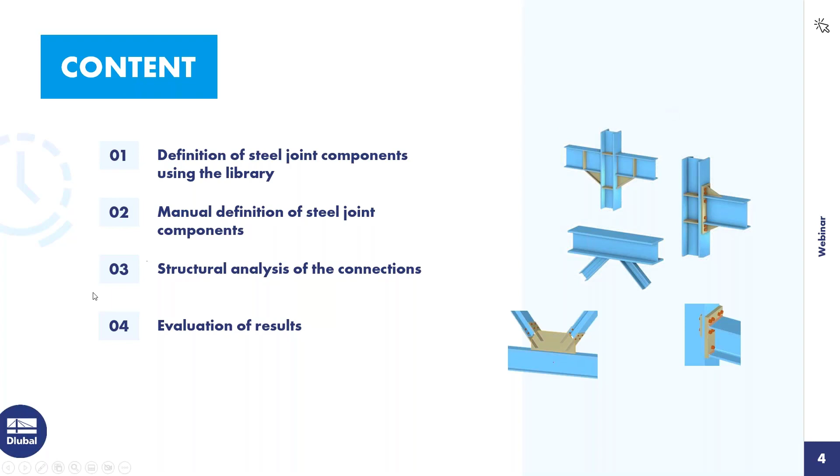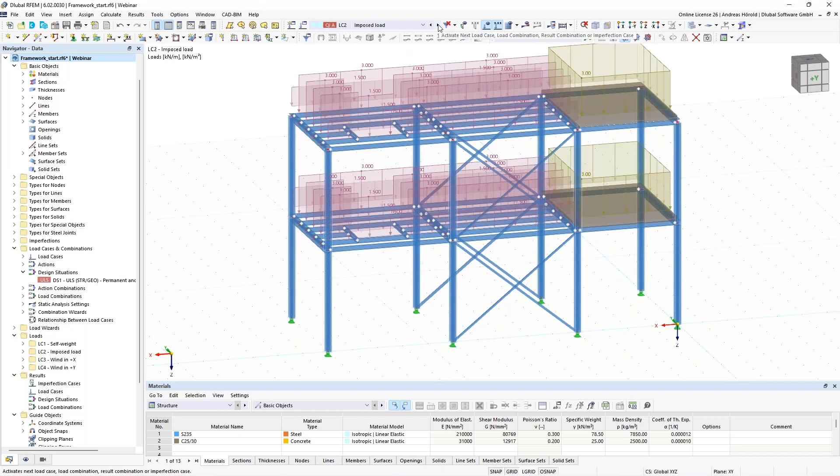Let's turn to the program, RFEM 6. Here's a simple model, a framework with frames in one direction and bracings in the X direction. We have several load cases, for example the self-weight load case, the imposed load, and two wind load cases, one in X direction and one in Y direction. We also have several combinations and a design situation.

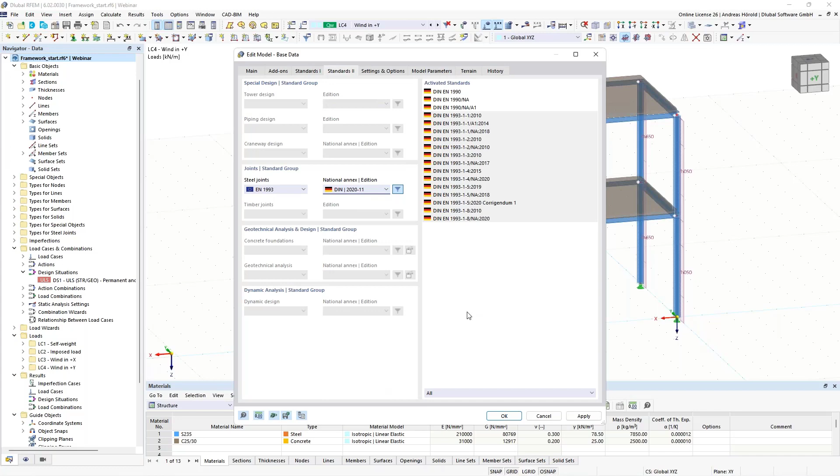To design the steel joints, I have to activate the add-on under Base Data, upper left. I open the dialog, and under Add-ons it's already activated from my test. The standard is also set here for the load case classifications, and the standard and national annex - in this case for Germany - for the steel joint design.

Once the add-on is activated, there are two new folders: Types for Steel Joints for the creation of steel joints, and at the bottom, Steel Joints Design with the design situations and ultimate configurations. I'll show you that ultimate configuration component in the next dialog.

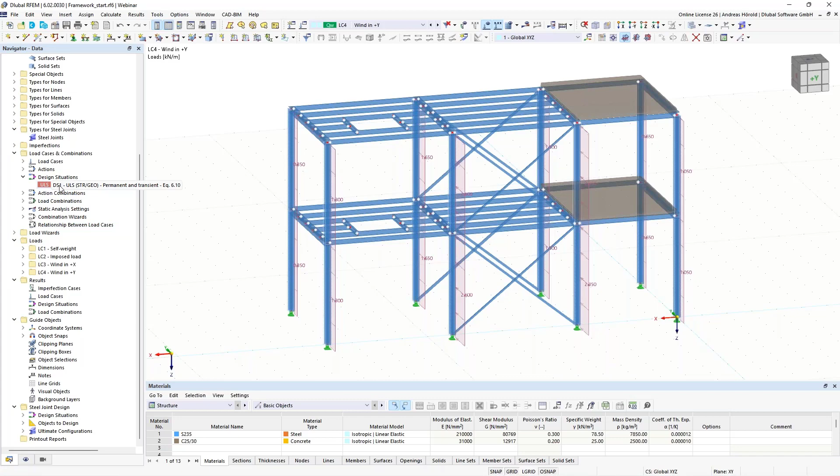But before that, let's go to the design situations. You can see again the load cases here, the actions, and the design situation. It's important to note that if you activate the add-on, the default setting is that the steel joints design is already activated - just note that it is here.

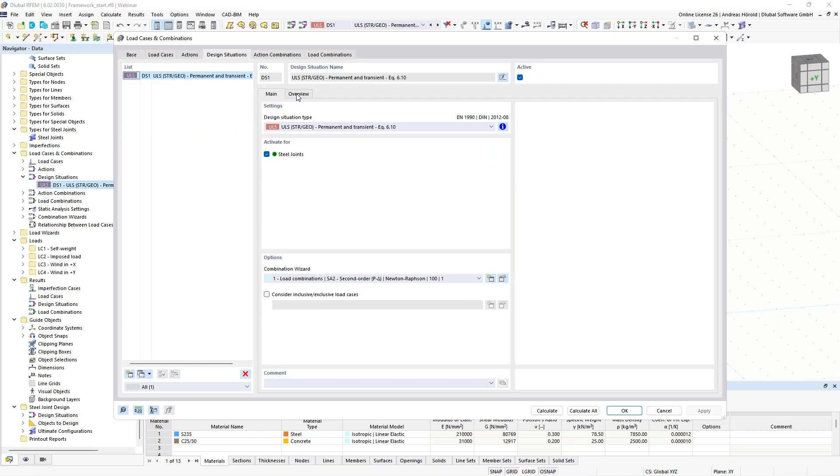These are the action combinations and the load combinations, and those load combinations are included in the design situation - you can see that here in the overview. So we can leave this dialog and start with the first steel joint.

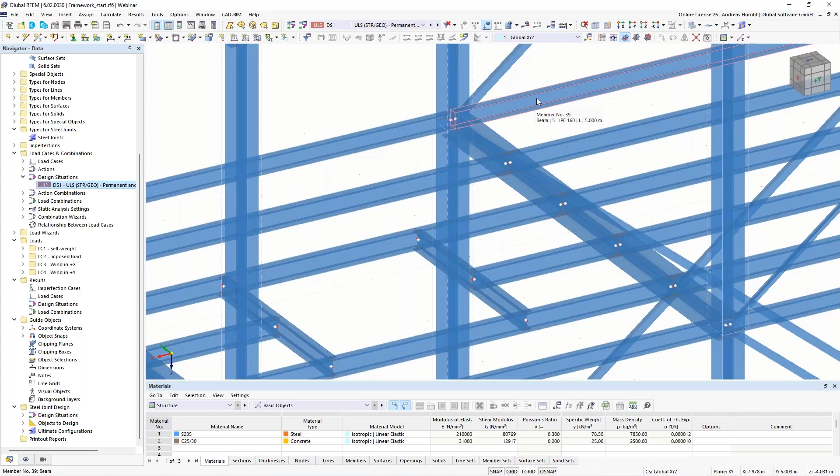Let me show you in the model. I would like to use this node here and define all connections for it: the rigid connection of the steel frame, the pin connections of the platform beams, and the two connections for the bracings, which are L sections.

Let's start. Right click on Steel Joints on the left side in the navigator data, and select New Steel Joint. First I select the joint - the node, sorry - node 33, and apply that. There are 7 members that have their end or start point at that node.

We can click through them: Member 1 is the platform beam, that's the bracing, the frame or horizontal beam of the frame, the upper column, the lower column, the other platform beam, and the upper bracing.

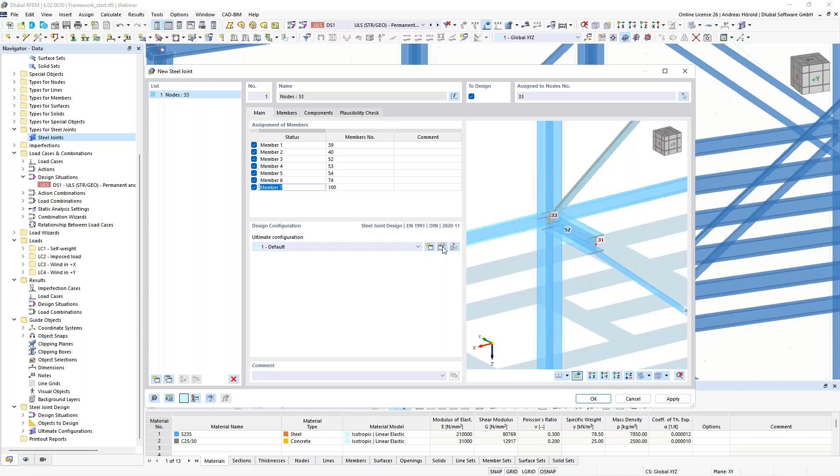Here you can see the design configuration. I'll open it - you can perform a buckling analysis. Then you can see the standard settings here, such as the maximum number of iterations, which you can increase, for example. You can also increase the number of load increments.

That's the standard setting, limit plastic strain. That's the value from the standard. And so on. I leave all settings as they are, also the safety factors here.

If you want to perform a buckling analysis, you can go to that dialog. You can also increase the number of lowest eigenvalues, number of iterations. That's the limit load factor from the standard, it's 1.5 according to the Eurocode.

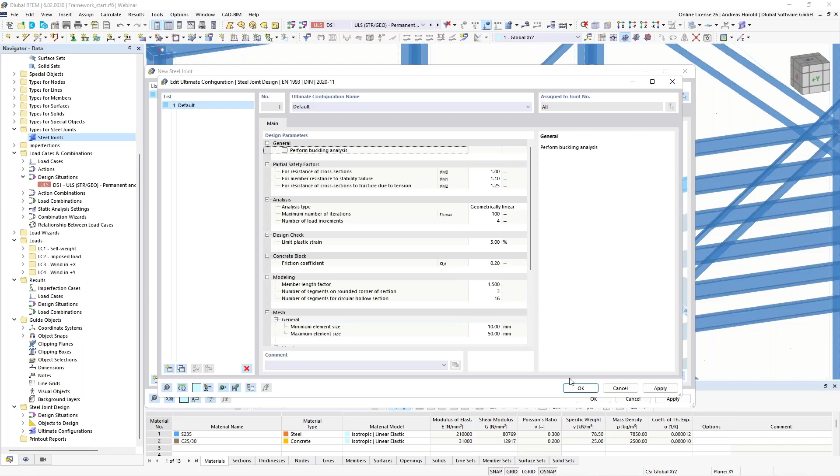Okay, then we go to the next dialog, members. The finite element analysis requires at least 1 member to be supported.

I select the lower column. The column is in reality supported here, and I will support at least this column. Okay, and we define also that the column is continuous. That's automatically overtaken for the 2 columns.

So the member settings, you can see here the member settings from RFEM, S235, and the sections, and we overtake the sections, of course.

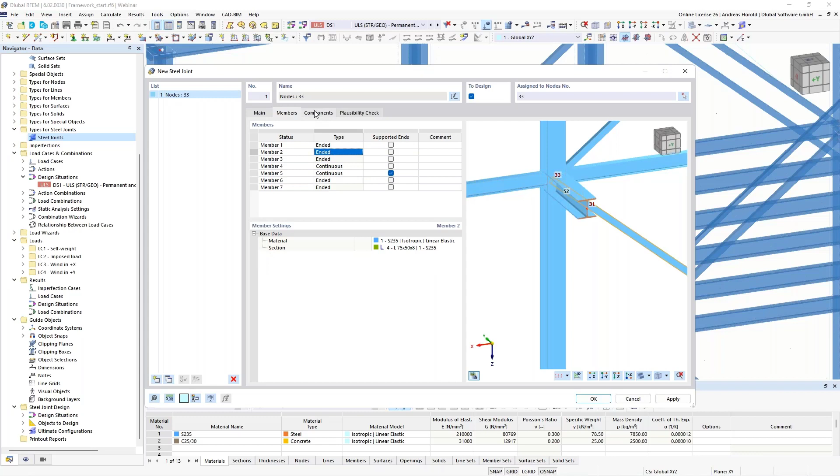So then under components, you can use the library and you can create single components. I open it. You can see 4 categories: the modifications, member cut, plate cut, we will use both of them.

Then the plate editor: plate, stiffener, haunch, and so on. Then under connection elements: end plate, fin plate. Under others: the auxiliary plane, a help plane, then the welds and the fasteners.

Yeah, that's the current state of that library. We will extend that library continuously. A team of 8 members or employees are working on the development of the add-on steel joints.

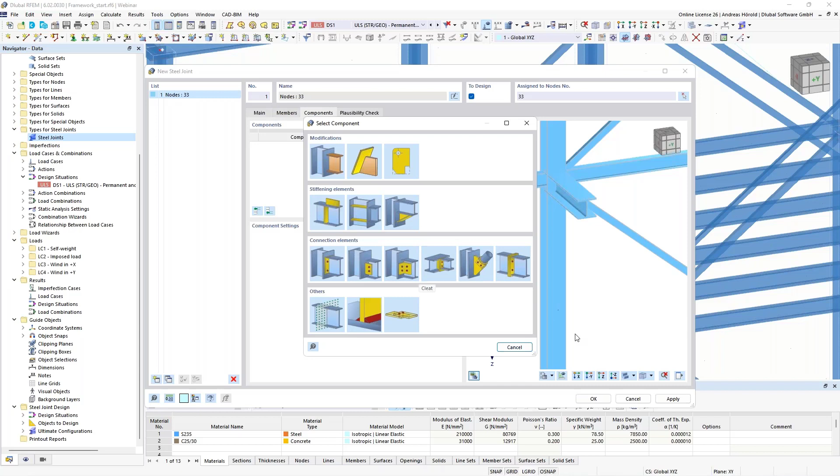We also extend the templates. I go to the template library. So there are also 4 general categories: the rigid connections, the pinned connections, truss, and the bracings.

I click through some examples: beam to beam, beam to column, with haunch, such a connection. If you download the trial version or you already bought the program, you can click through the single components.

Maybe cross joint. I will show you some pinned connections: beam to beam with cleats, fin plate, short end plate, beam to column, the same, cleats, fin plate, short end plate, and so on.

Trusses, you can use that for diagonals or for bracings. The K-joint, welded, such a connection. Also for bracings to use welded, it's quite new.

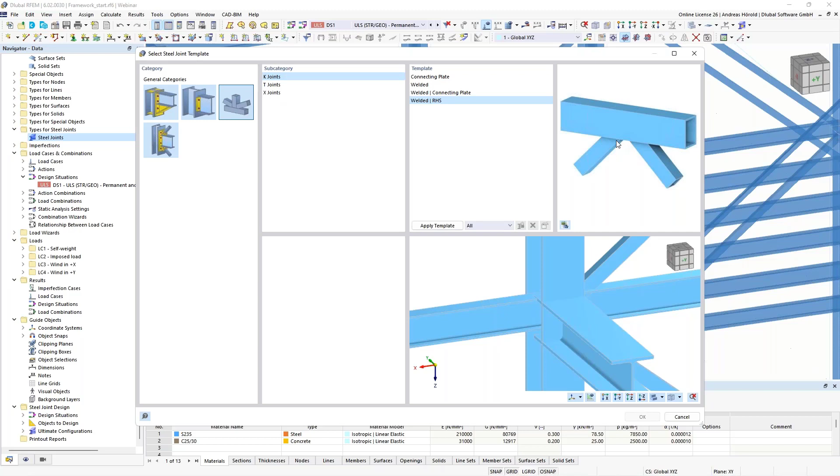The rectangular cross sections with a weld, T-joints, X-joints, and so on. Then last but not least, the bracings. Similar connection, such a connection.

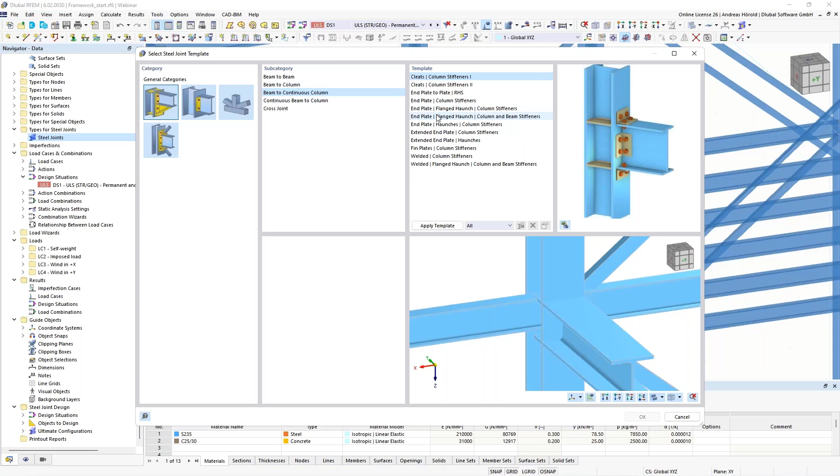But we will start with the first connection, the rigid connection. I use here the category rigid, beam to continuous column, and this one, with a haunch and column stiffeners. If I apply the template, we will see it in the preview here, right at the bottom.

And you can see we have to modify that connection. We leave the dialog with OK. And we go through the single components. So I extend the window a little bit.

Okay, so then we start with the end plate. Member 3 is okay, you can see member 3 is selected if it is chosen. Then the reference member is the column, you can see it's selected. We use a thickness of 15 millimeters.

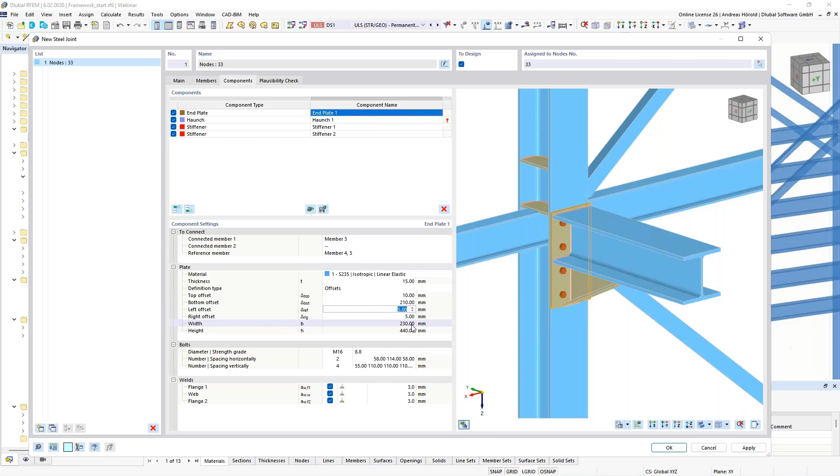Then 210 millimeters, left offset. We don't need an offset, we say 0. On the other side also 0. The rest is quite okay. So...

Then the bolts, we use a diameter of 20 millimeters and a screw strength of 10.9. So then you can use our values here, it's quite okay for this connection.

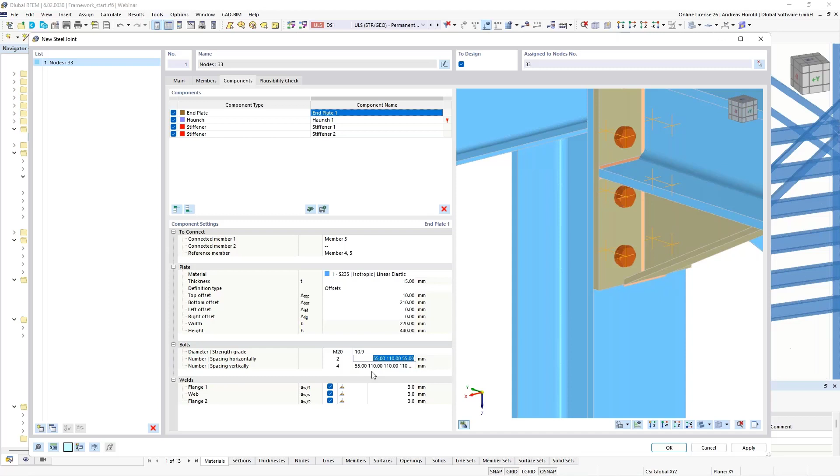I will only change the vertical spacings, I use only 3 bolts. And I only entered the first 3 values: 70, 95, 150, and the last dimension is calculated automatically.

Okay, then double fillet welds for the flange, 6 millimeters, then 4 millimeters, and also 6 millimeters.

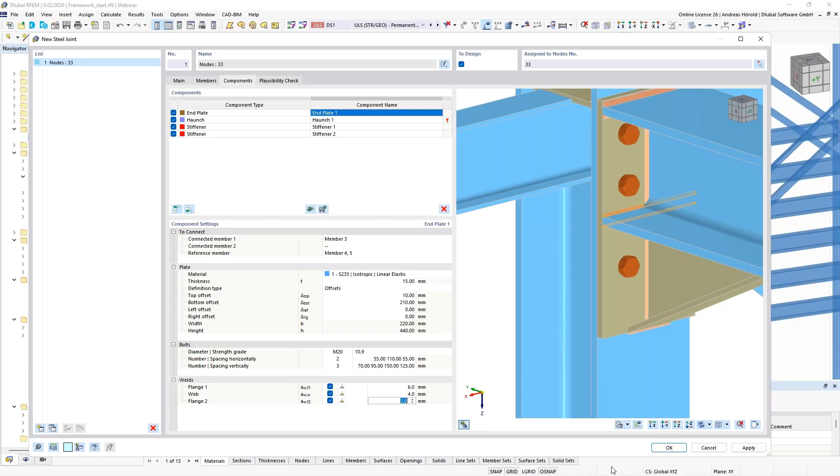Okay, now you can see we have to modify the haunch, that's the next step. So member number 3, that's okay.

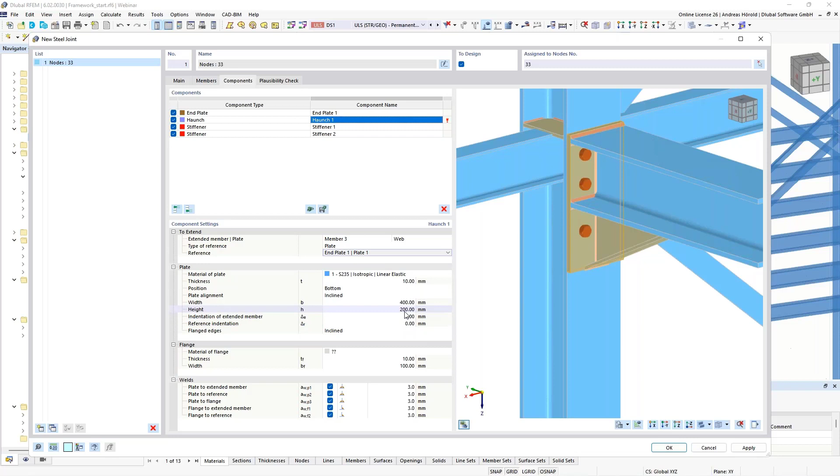So then the plate is also okay, and plate 1, that's okay. So the other values are also quite okay. I decrease that value, okay, and you can see now it's okay.

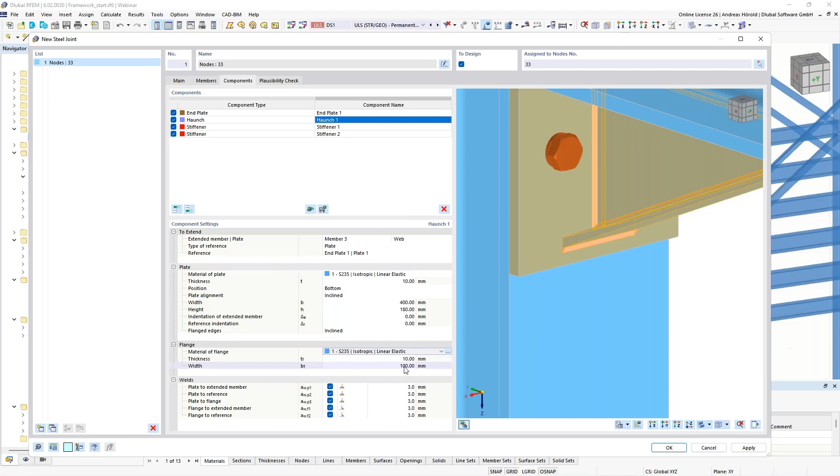So then I have to define a material for the flange, we use also the 235 steel. So then the width can be larger, 200 millimeters in that case. Okay.

So then the welds, that weld here, you can see it's selected, 4 millimeters, now we can leave the double fillet weld. Then this weld also, the double fillet weld, 4 millimeters.

Then plate to flange, this one, also 4 millimeters. So then the flange extended member.

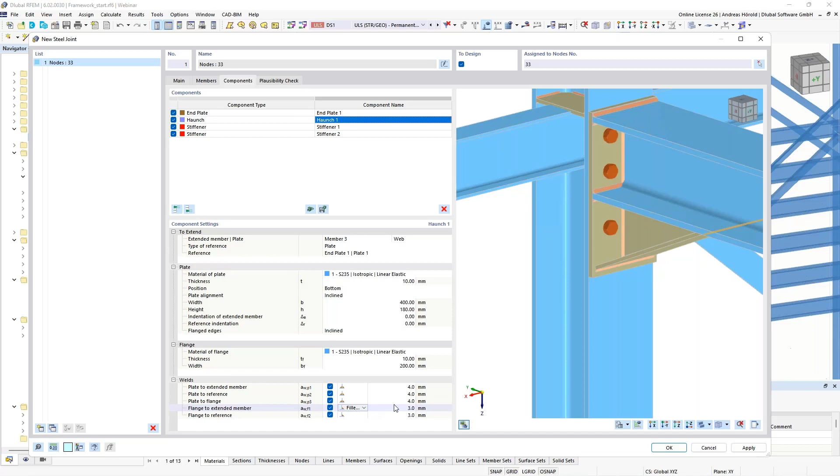Now this is this one. We use another weld, a butt weld rear side. And for this flange to the reference, it's this weld, we use a double fillet weld.

Okay, and 5 millimeters. So the haunch is quite okay, but the stiffeners not. So that stiffener should be quite okay. Let me check the values. Yeah, okay, I only define a weld of 4 millimeters. But we have to move the upper stiffener here.

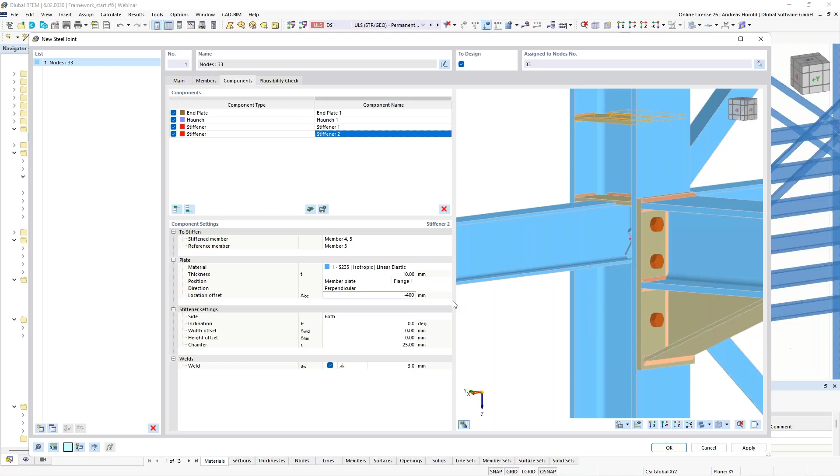So the value is minus 400. Okay, and I've also to change the weld. Okay, the rigid connection is finished.

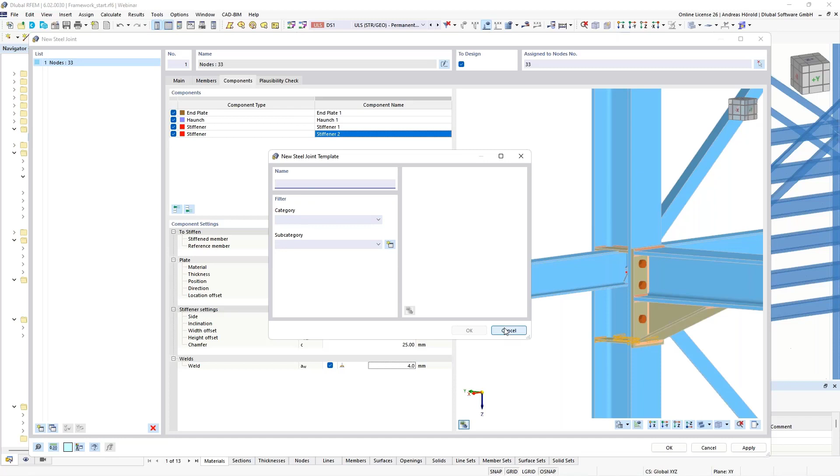And yeah, it would be possible to save it as a template, for example, to use it for the other rigid connections for the frame, for example, on the edges of the framework. And then you could press that button here, save component as template. You can give it a name, select the category and subcategory, and so on. Okay, I don't do that.

I continue with the connection of the platform beam, of that beams here. So that's why I use a component at the end, an end plate, this one, end plate.

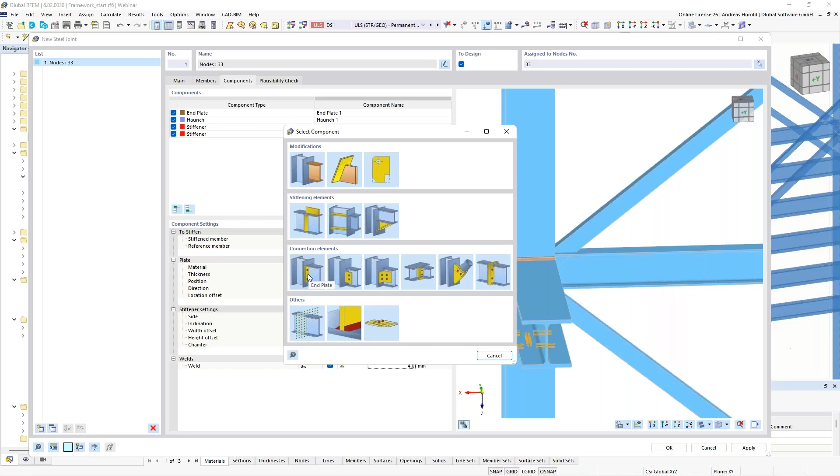So connected member is member 1, this one. And the reference or the other connected member is the member on the opposite side. It's member 6. And the reference member is the column, that's the members 4 and 5. Okay, now you can see the end plate.

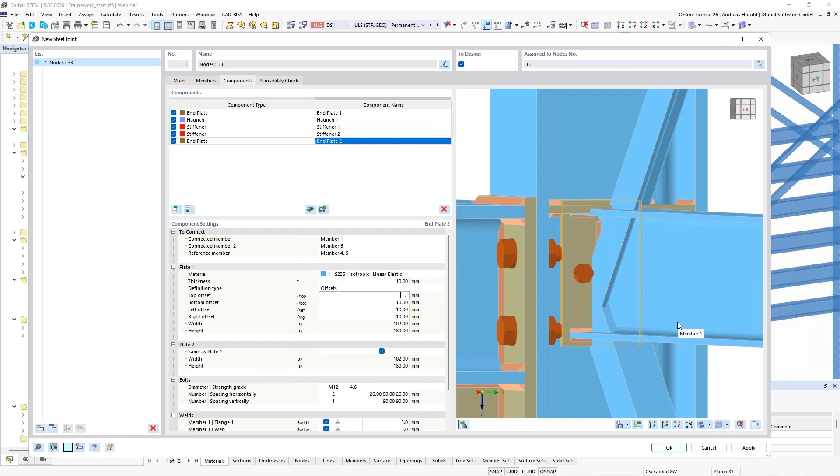So same material. I decrease that value here. Now we don't want to connect the flanges. Also on the lower side, minus 20. Okay, the rest is quite okay.

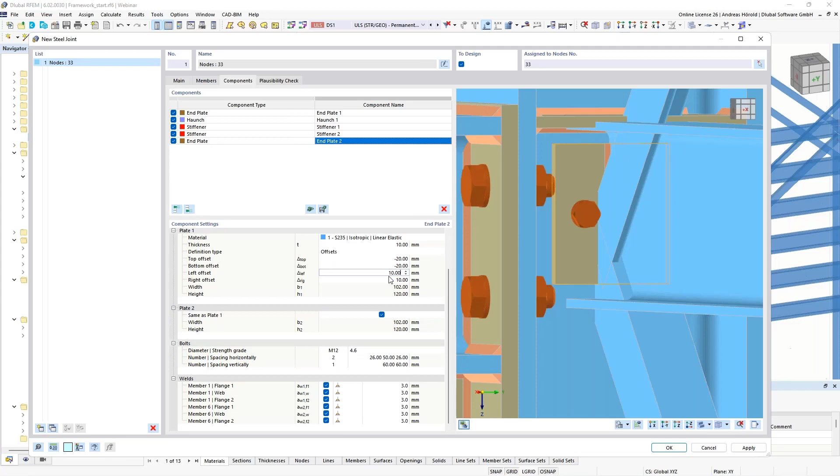The opposite plate should be the same. It's on this side. Yeah, you can see it here. So then bolts M12, it's okay. 4.6 as screw strength, it's also okay.

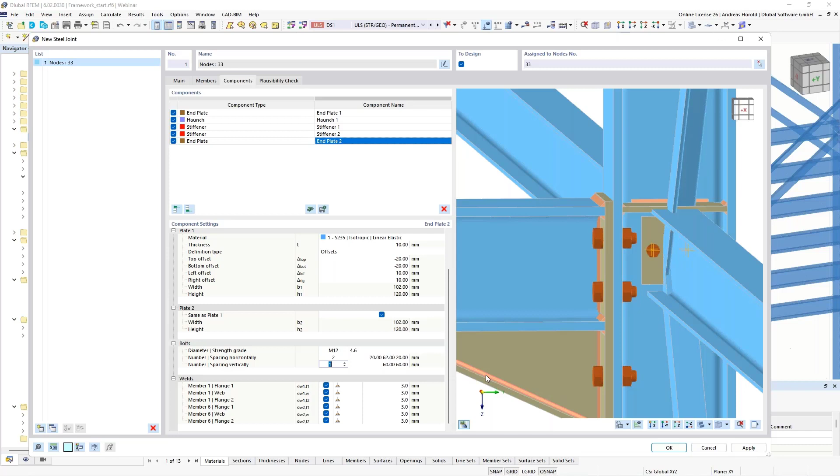Then I enter the value 20 and the rest is calculated automatically. Then I use also 2 vertically and enter the value 35.

That's good. So then we turn to the welds. We don't connect the flanges. Yeah, that's why we deselect our flanges. Only the 2 webs should get a double fillet weld. And the value is 4 millimeters.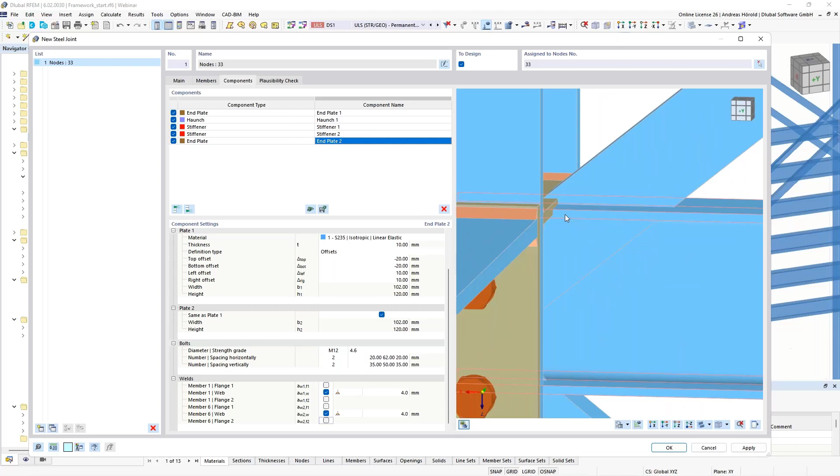So, and now the 2 end plates are finished. Not yet, sorry. We have to add a cut here. Yeah, it's in conflict with that plate here, with the plate of the rigid connection.

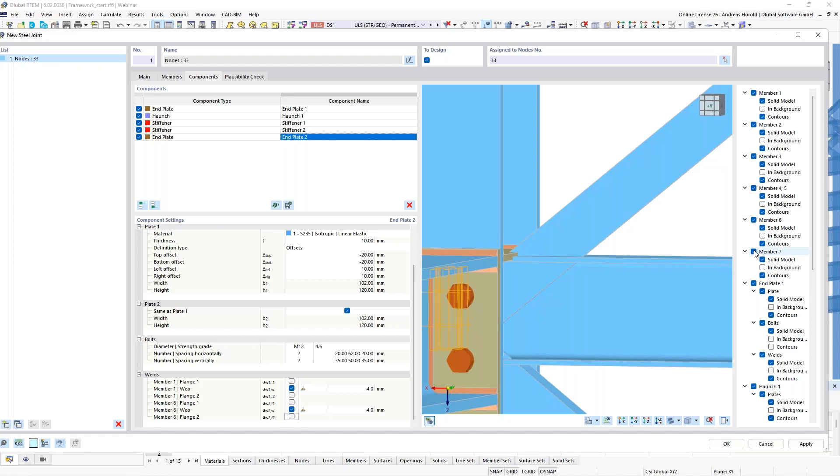To have a better overview, here with that button at the bottom, I deselect the member number 7. Now it's better to see, I think.

So I add a member cut. Which member? Member 1, by plate. And cut via stiffener 1, plate 1, that one here.

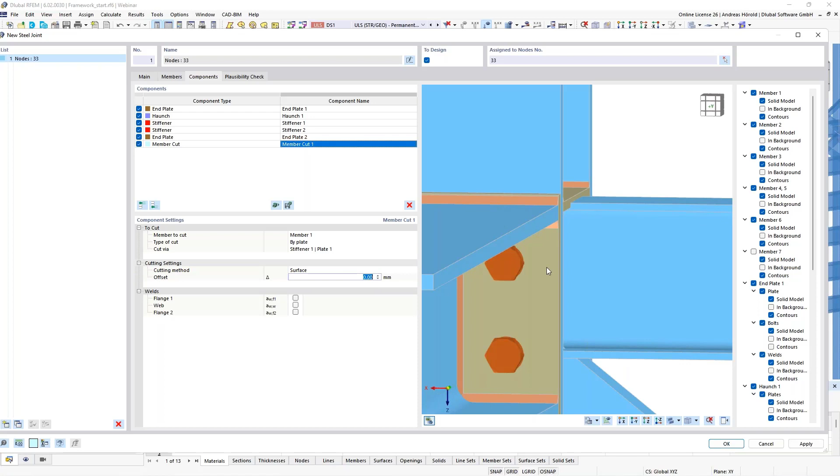Surface with an offset of 15 millimeters. And now you can see the cut.

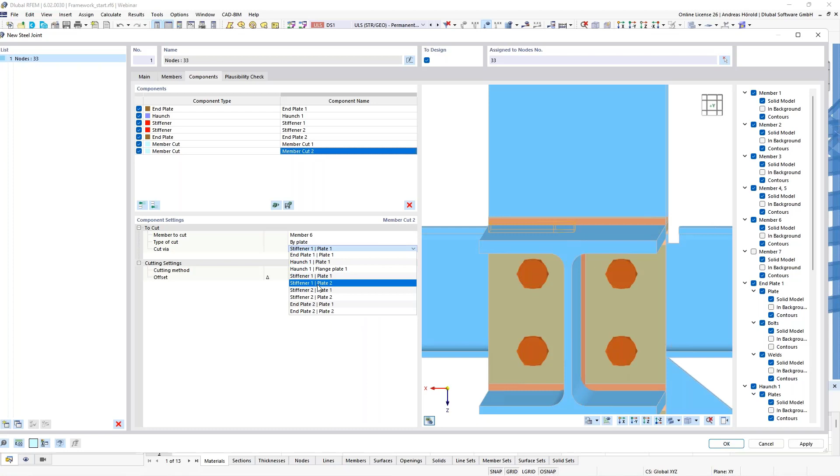Okay. To have it on the opposite side, I can copy that. That's also a new feature. By right-click, I copy the components at the end, only this one component. And I have to define another member. In that case, member number 6, the left side. And the cut is via stiffener 1, plate 2. So you can see it.

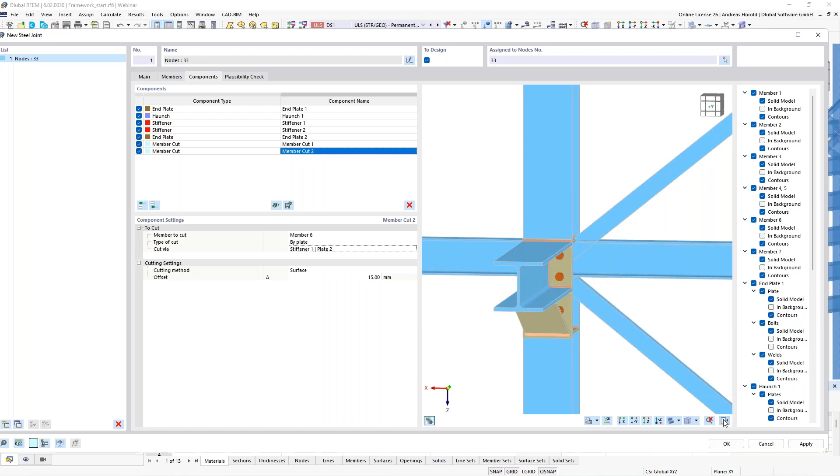So now the rigid connection is created and also the pinned connections, and we continue with the bracings. I select number 7. Okay, I can close it to have a better overview.

Yeah, since we haven't got this component that I want to use in the library, I have to create it with the single components. Yeah, it's a little bit more complicated, but you can see now that it's very flexible. Yeah, you can define almost all connections with the single components.

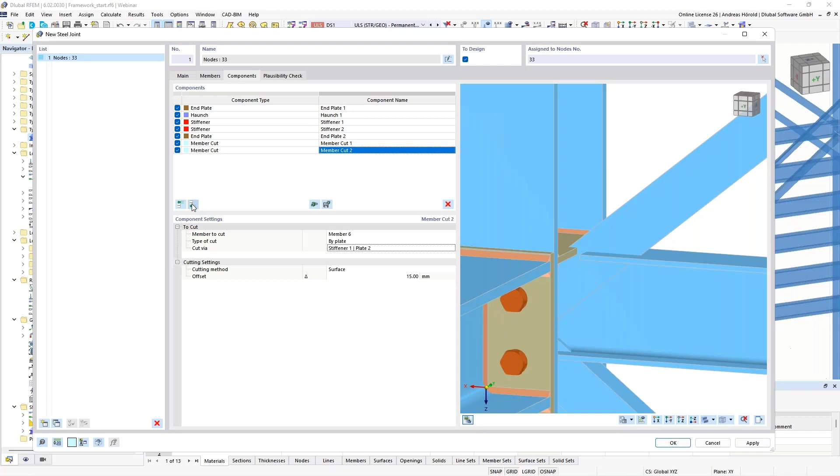So I start with a plate, stiffening elements, plate. So the material is S235 again. The thickness should be 8, then 250 and 170.

And the position should be a member plate. So, and that's the member number 7 and the leg 1. Now you can see it in the preview on the right side. Okay, but I have to move it a little bit. I use 250.

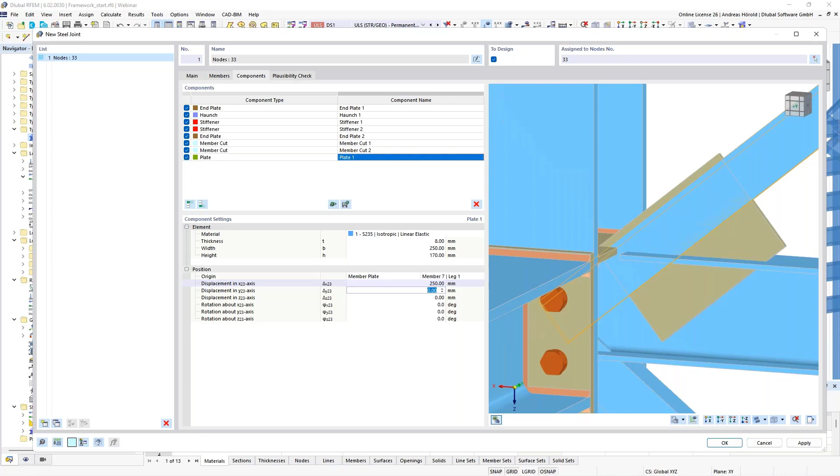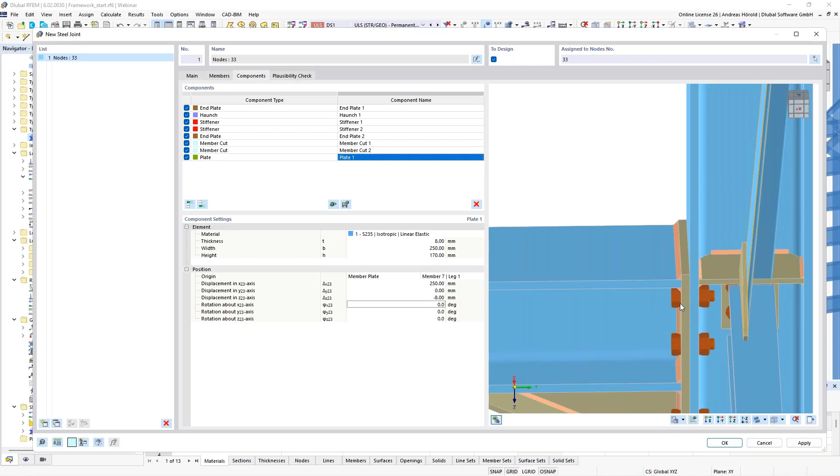And to have it on the side of the leg, I enter here minus 8. Yeah, that's the offset of 8 millimeters. Yeah, and you can see now it's not in the axis of the platform beam. Yeah, that's the difference between the static model and the connection model. Yeah, the axis of the L section is here, and the axis of the horizontal beam here, and the plate is now has an offset.

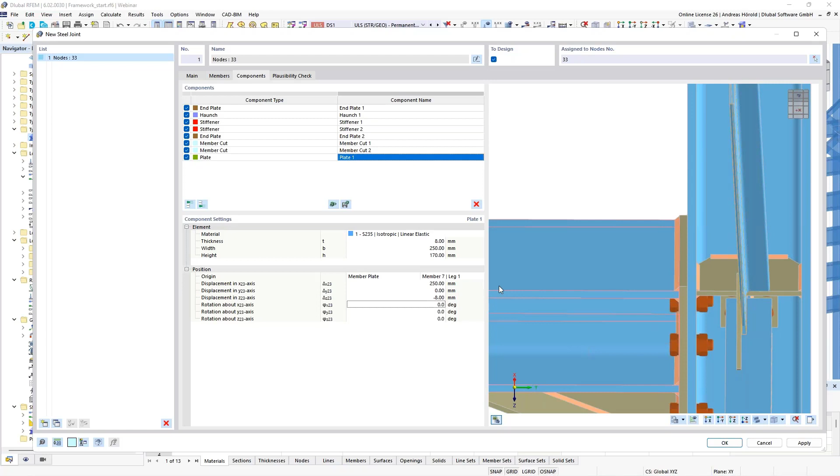Yeah, you can avoid that if you define an eccentricity for the bracing in the RFEM model, or you can ignore it for the steel joint design. I ignore it for the steel joint design. It's up to you how to use it. That's the difference between the axis model in RFEM and the detailed connection model.

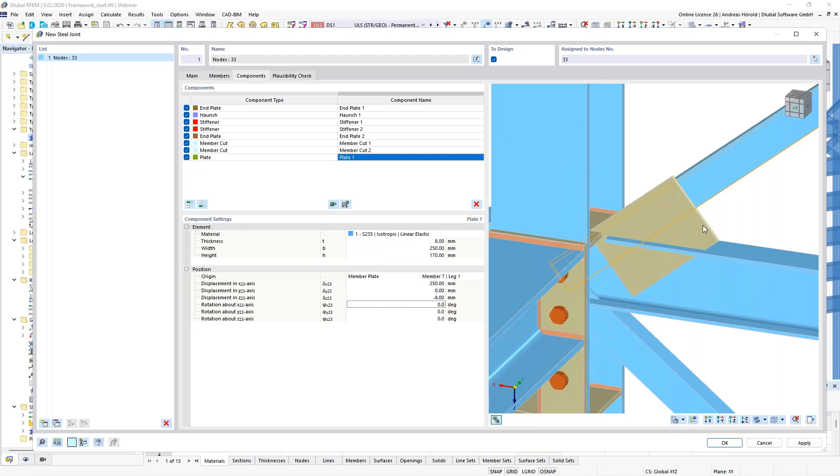Okay, the plate is not finished. We have to enter cuts. I enter this plate cut. The plate is number 1. By member plate.

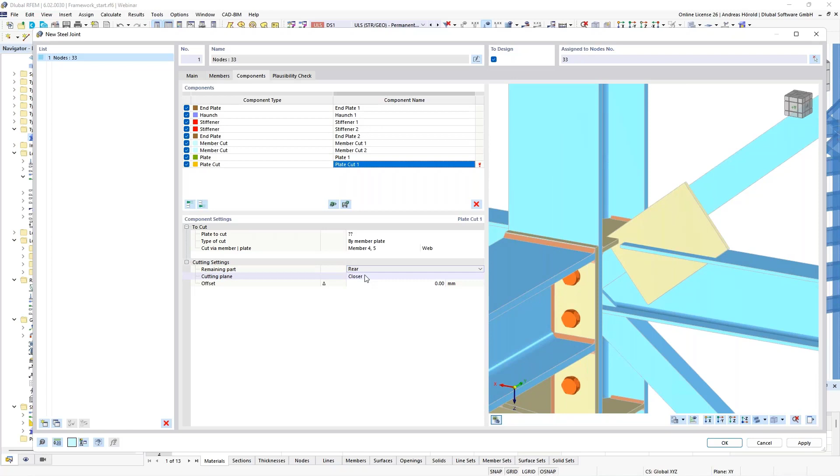Cut via, I select the column, and the web of the column should be the reference point. Okay, the rear side closer end is the cutting plane. So we can do it step by step.

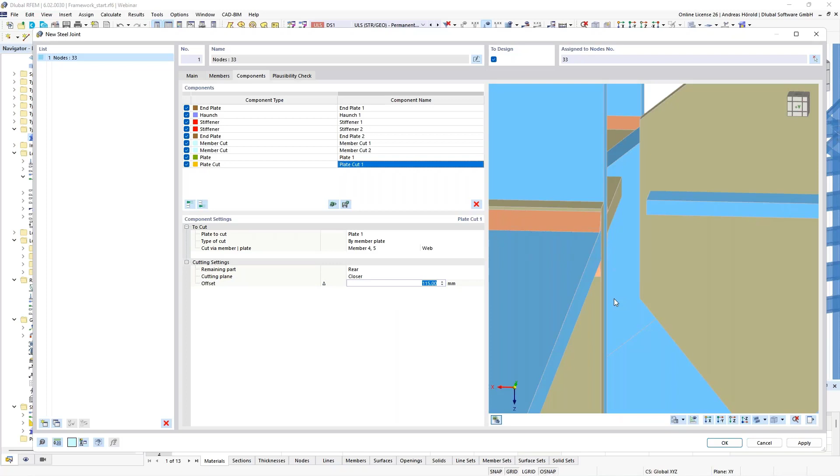No, that doesn't take the plate number 1. Okay, you can do it step by step, or calculate which is the right place. I would like to have the plate cut here at the end of the member cut, and that's 120.25.

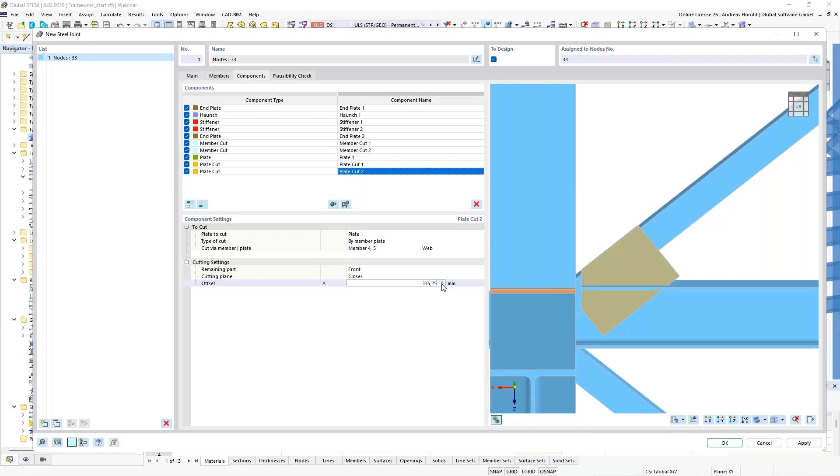Okay, this cut is quite okay. We enter a new cut, so again, plate number 1. By member plate, that's the same again. Member 4 and 5, and the web. That's the reference point. Front, the closer end, and I enter minus 335.25. Okay, only one cut is missing.

Plate cut. Again, plate 1. So now by member plate. And this time member number 1. You can see it's selected. And the upper flange, flange 1. Okay, the rear side. Yeah, and that's all. I only have to enter a double fillet weld of 4 millimeters.

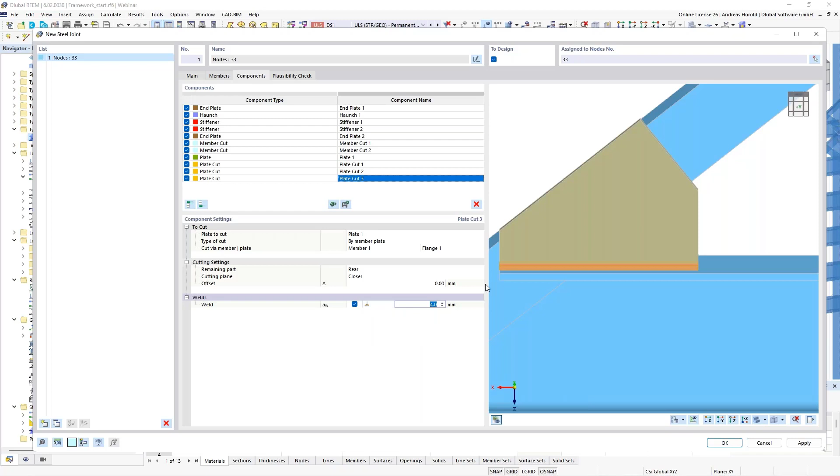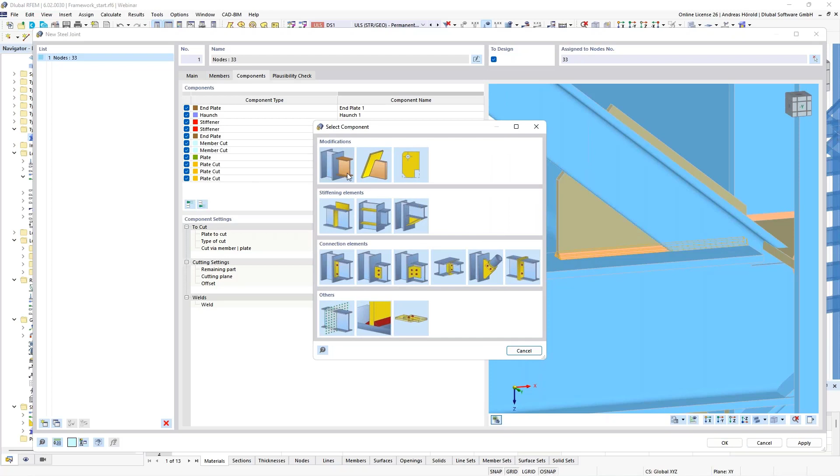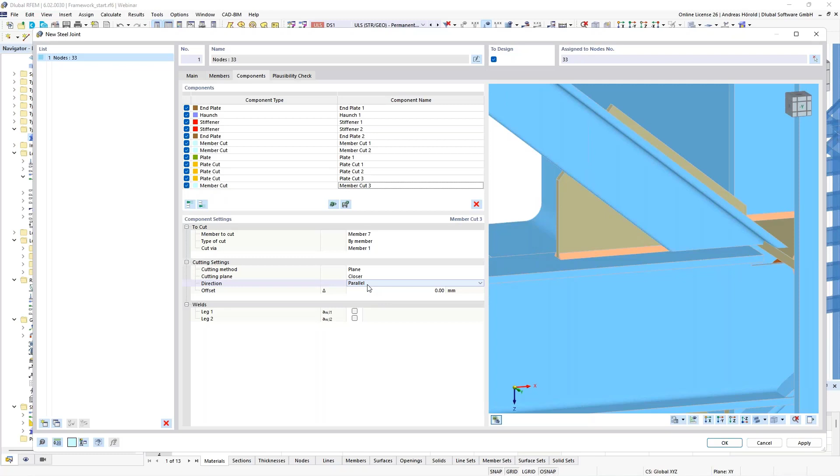So now we have to cut the member. Now you can see it's in conflict with the other parts of the connection, so I enter the next component. Here left above, a member cut. The bracing is member number 7. By member number 1, that's the platform beam, the horizontal beam. Then it shouldn't be parallel, but perpendicular. And a small offset. Okay.

So now we have to define the bolts, meaning fasteners. I add the component fastener. The component is member plate, member 7, leg 1. The other component is the plate number 1. So that's okay.

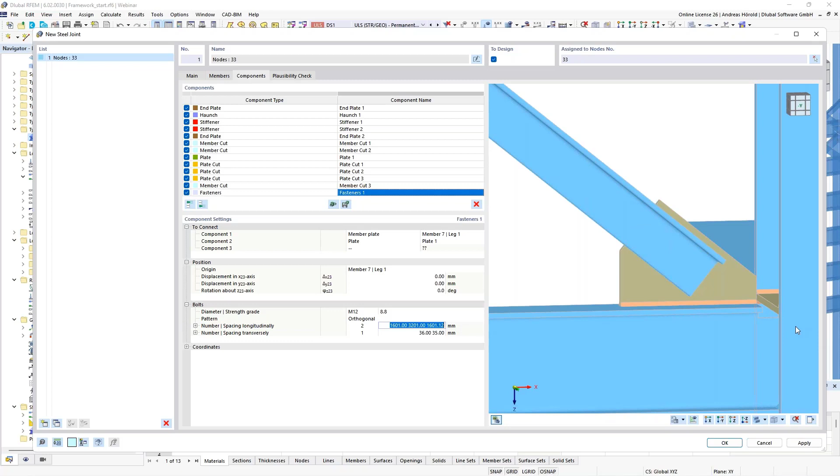M12, I use another screw strength, you can decide by yourself. I, for example, use 8.8 this time. So that's the distance from the crossing here: 300, then space, and the distance between the screws or bolts should be 40. And that's all.

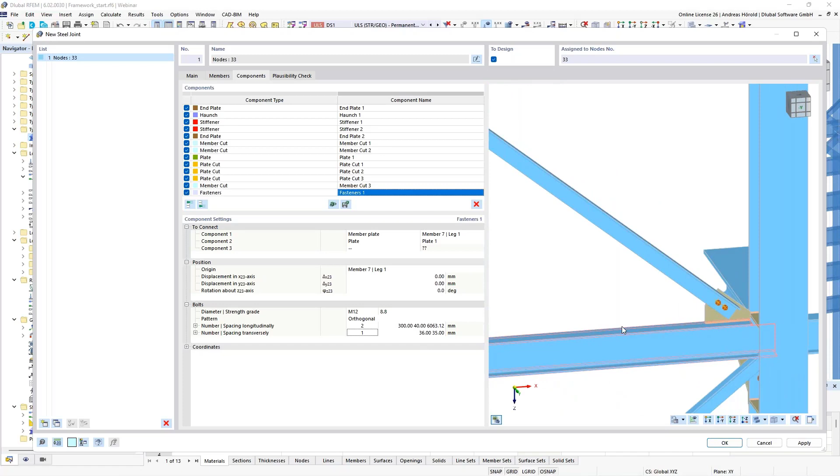And now the connection for the upper bracing is finished. For the lower bracing, we use the same function. I copy that, so I copy the last 6 components. I select all, then right click and copy components at end. So now it's the same connection, and I have to modify it.

So that's plate number 2, I start with plate number 2. I only define here another value, member plate, but this time another member: member number 2, the lower bracing, and leg 1. I hope you can see that it is selected. Okay, then those values are almost okay, 90. Okay.

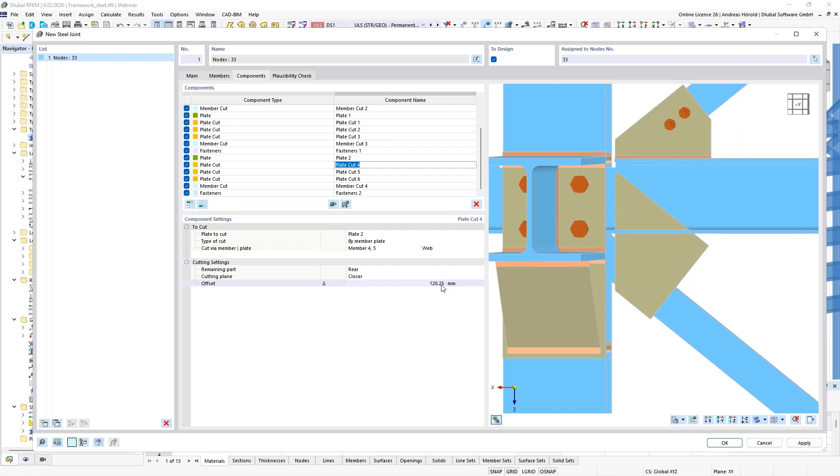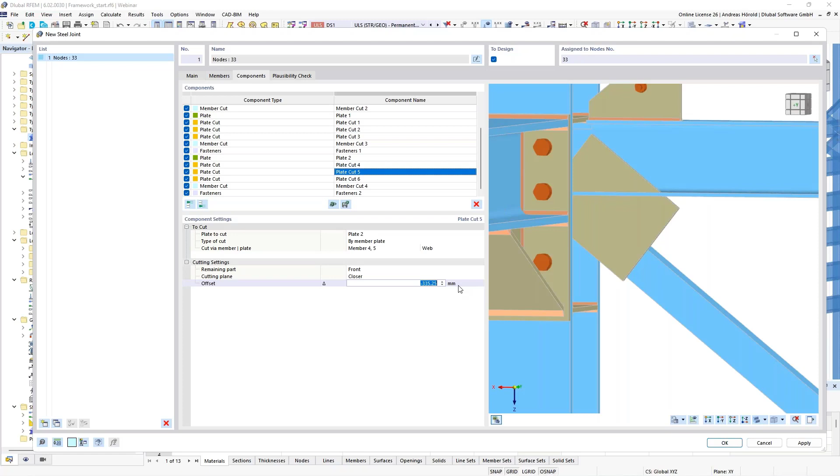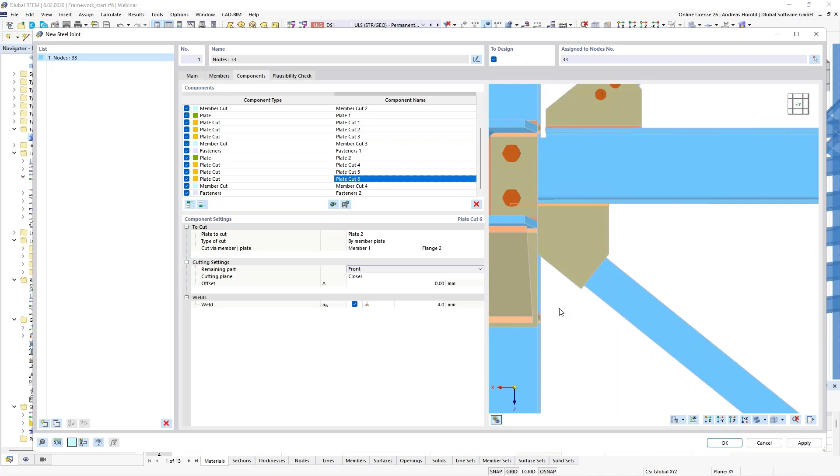And only this plate cut here, the flange is missing. Flange number 2, the lower flange. Then the front side. Well, and that's all. So then the member cut, I rotate it a little bit, but you can see it all. This time member 2. Yeah, and that's all.

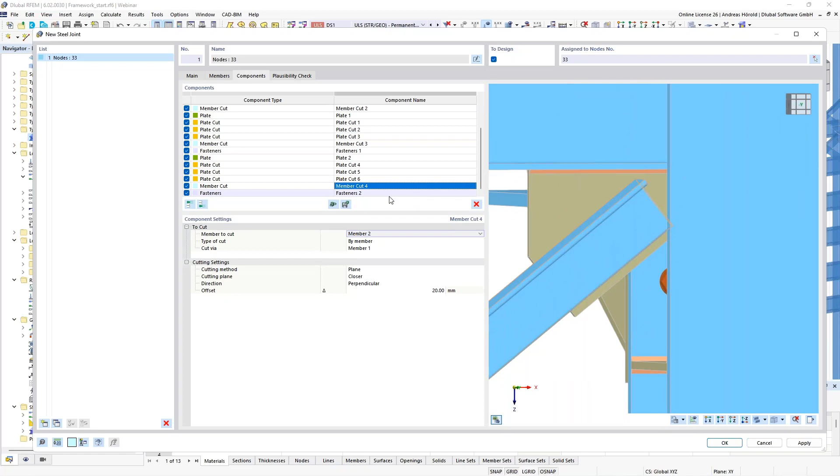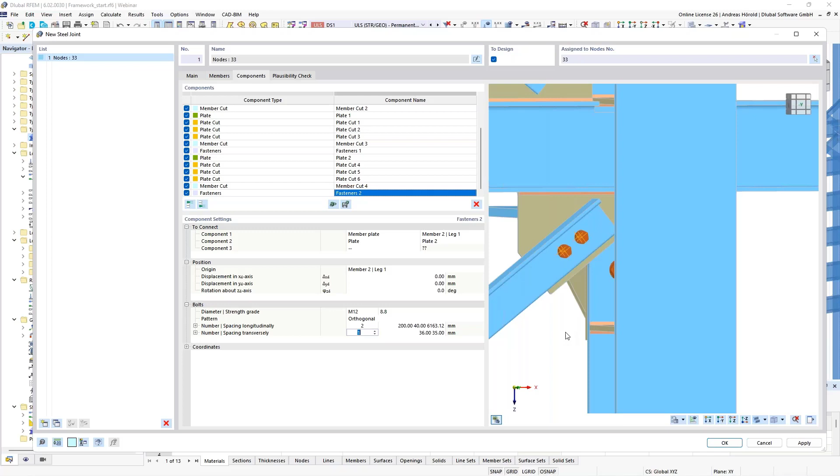Only the fasteners need to be modified. Member 2, leg 1. So, and 200 space 40, and that's okay. So you can take a look if everything is okay, and you can do a plausibility check. Yeah, no errors found. Now that's quite good, okay, I leave the dialog.

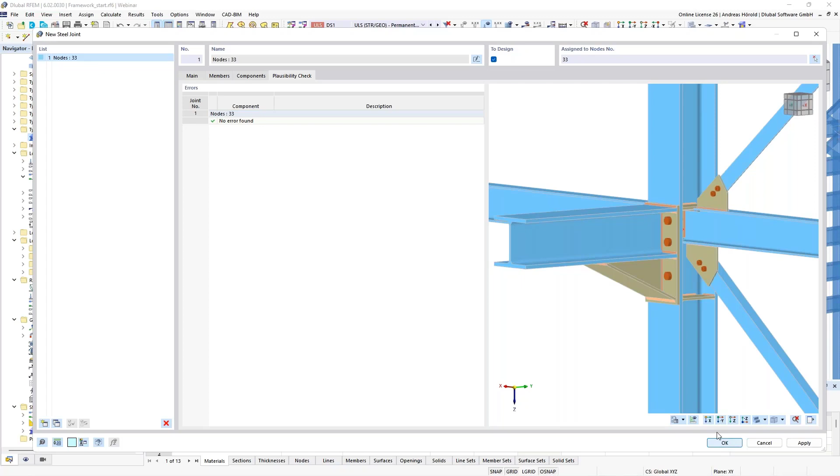And you can see the connection in the preview. If this button here right above is activated, you can also activate the joint model or simplified joint model. Now I will use that. So, and now I can also use that connection for the other 3 nodes here.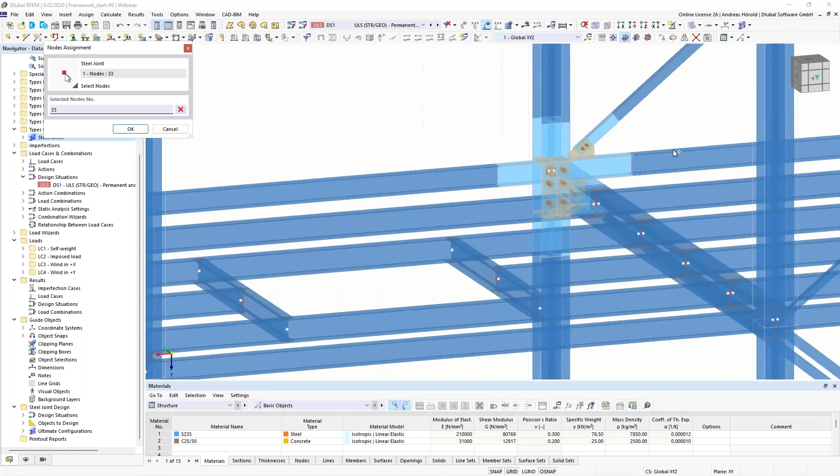So I can, for example, open the dialog by double clicking on the connection, and I can select the other 3 nodes. Okay, so I apply it. And now we have got 4 connections, 4 similar connections.

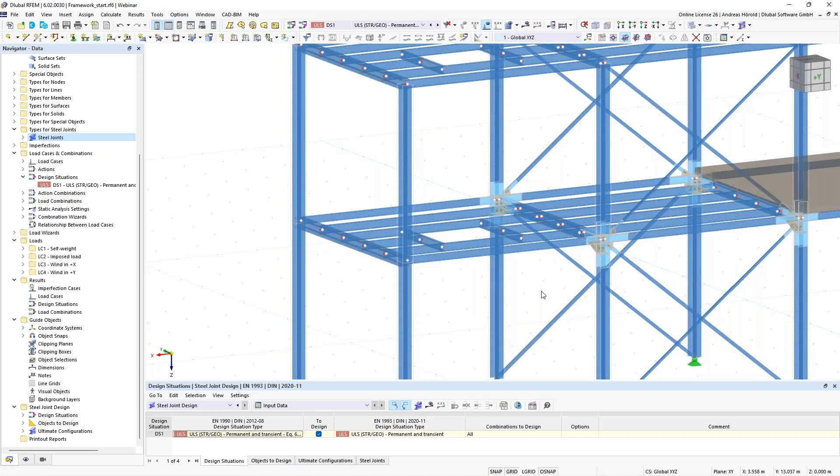So then we can open in the table here the steel joint design, and if I press that button here, the calculations would start. I skip the calculation, the calculation time is about 15 minutes on my computer. I skip the calculation time and I open the calculated model.

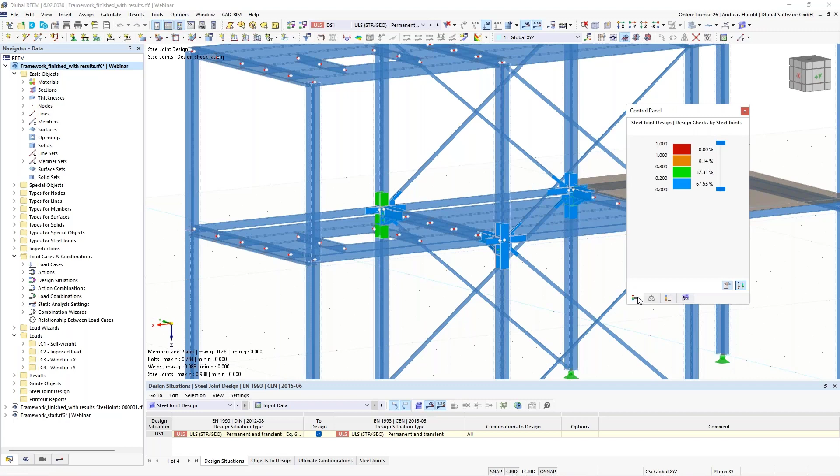I open the panel, and you can see the ratios here graphically. That's the connection with the highest ratios. I go through the table, steel joints, stress strain analysis. You can see the design ratio by design situations, by loading, by joint, by node, by components.

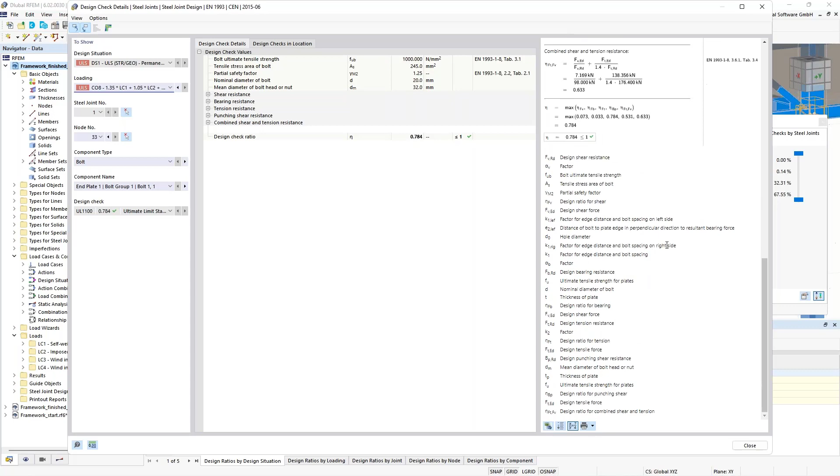If you go, for example, in that line here and open the design check details, then you can see all formulas from the standard for the bolts, also where you can find the formulas in the standards, and so on. You can also switch between the designs here, plate, weld, the welded design, and so on.

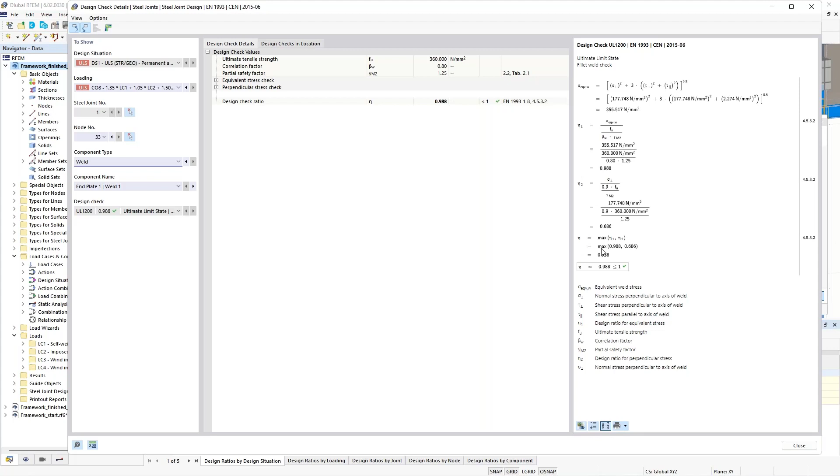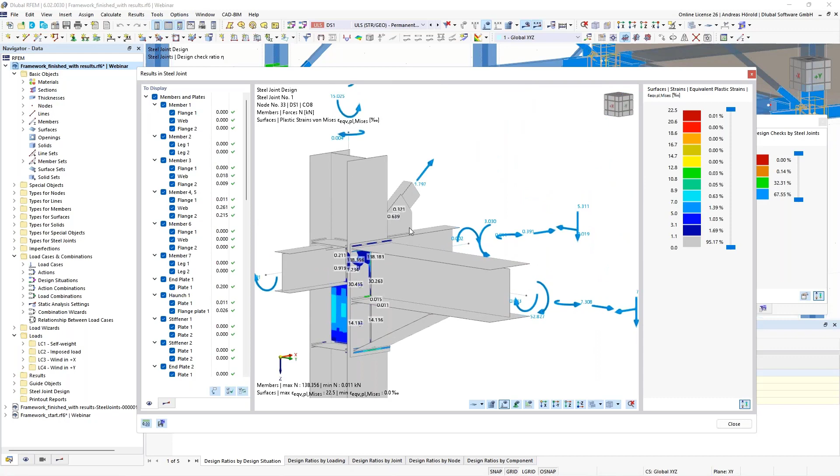Then when you click that button, the results in steel joints, you can see the detailed model. So it's the whole connection. You can see the ratios here graphically.

The gray area is a new feature for values that are not of interest, for example very small values. You can click through the single components, deselect, for example, the members and plates. Now we see, for example, here the welds and the maximum design ratios. You can go through all.

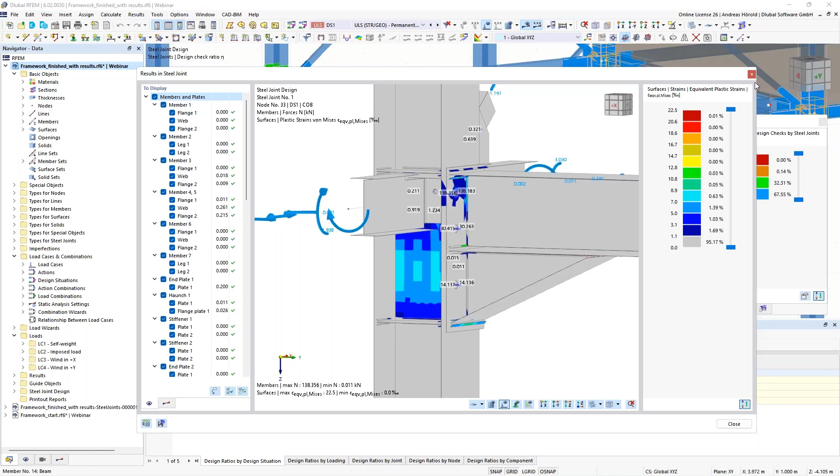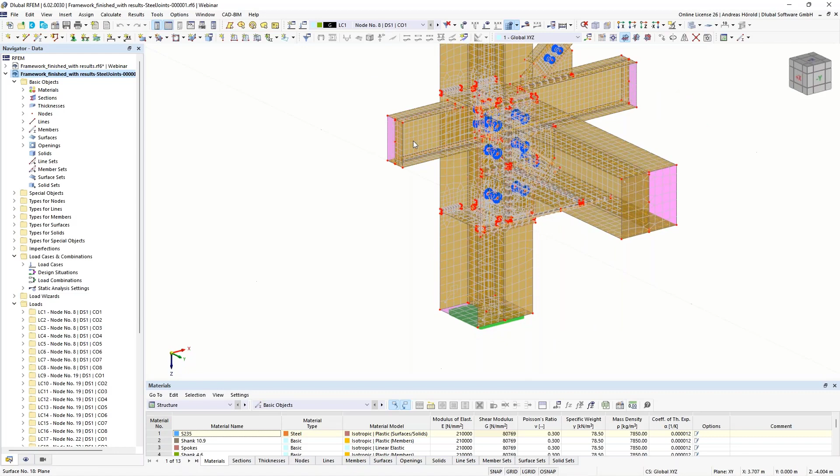So then you can save that submodel here with that button left at the bottom, and can open it. And that's the submodel with surfaces, the supporting of the column, horizontal beams as surfaces, the bolts, the welds. You can see a simplified model with surfaces and rigid links here.

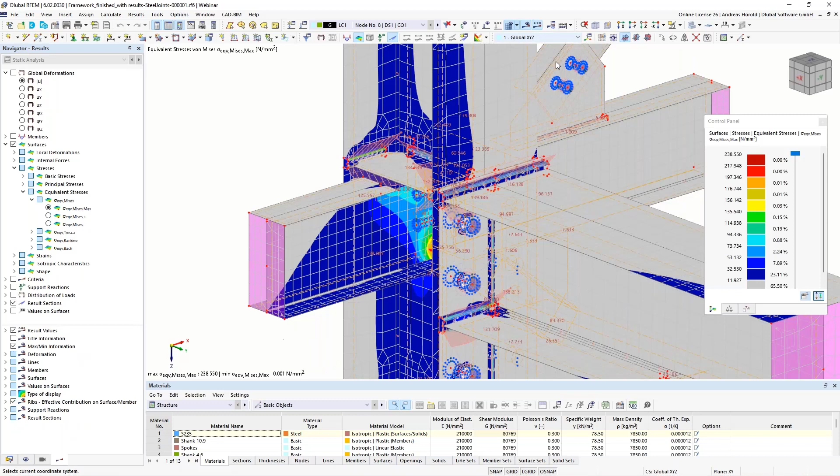Okay, then we can also take a look at the results on the surfaces. For example, here surfaces equivalent stresses, the sigma max Mises. And you can add dimensions here, and print it in the printout report.

Did I forget anything? Well, I think no. Okay, that should be all to this connection.

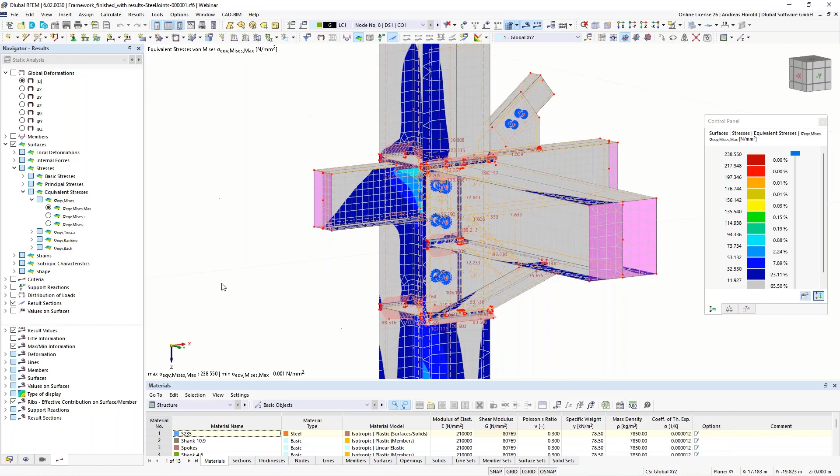I switch to another RFEM window with other connections that we already prepared. You can use the plates behind the flanges here for such a rigid connection.

Quite new is the welded connection of rectangular hollow sections. You can see where the weld on the fillet is missing. We are working on it. At the moment you are on the safe side. Only the straight components are connected. We are working also on the implementation of the round hollow section, and when we release it, I think also the welds on the fillets here are ready.